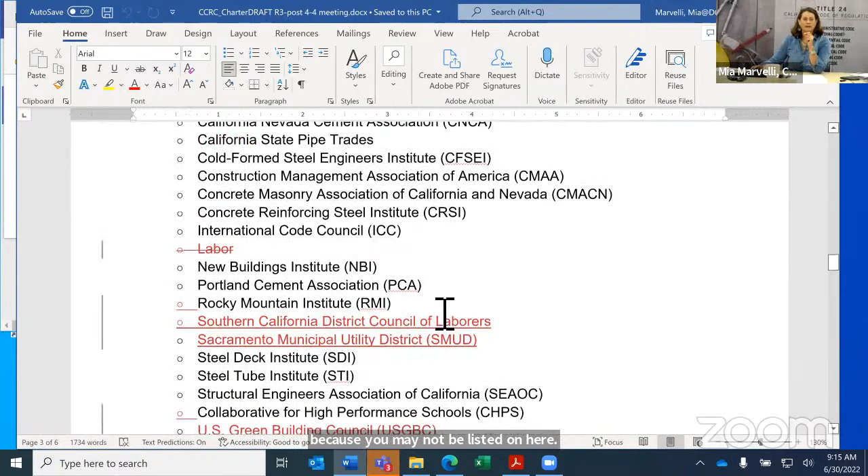I'm going to scroll through here very quickly. We had a consensus at the first meeting that everyone agreed on the rules of engagement for the meeting, and now this version simply adds the Department of Housing and Community Development. The other additions are a few state agencies and non-government organizations. We added a few, but I want to remind everybody that if you're not listed, this is a list that's including but not limited to. So just because you may not be listed doesn't mean you can't participate in the meeting or provide feedback. So with that, I'd like to turn it over to the Department of Housing and Community Development. They would like to provide their overview on their authority and role within the CCRC.

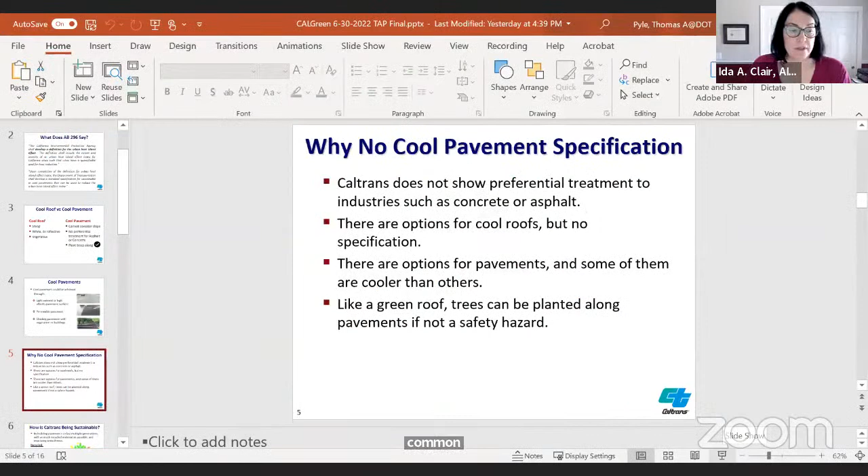Tom, can I interrupt for just a second? I apologize. Yes, please. You may need to forward your slides because the screen we're seeing is on the first PowerPoint slide, just letting you know. All right, thank you so much. I thought I was going forward. I hate it when this happens, don't we all? Tom, it's likely that you have it. There we go. That moved. Okay. Well, I tried to go to the presentation mode, but apparently I wasn't on the presentation mode. This mode works. We can see that fine. Does that work okay? Yeah, thank you. All right, appreciate it.

All right. The previous slides only had words, so I was kind of working my way through the words, so you didn't miss any bright or shiny pictures. So a cool pavement could be achieved through a light color or a high albedo, highly reflective surface. It could be a permeable pavement, and there could also be shading on it, or it could be within a city that has tall buildings around it that are also providing shade,

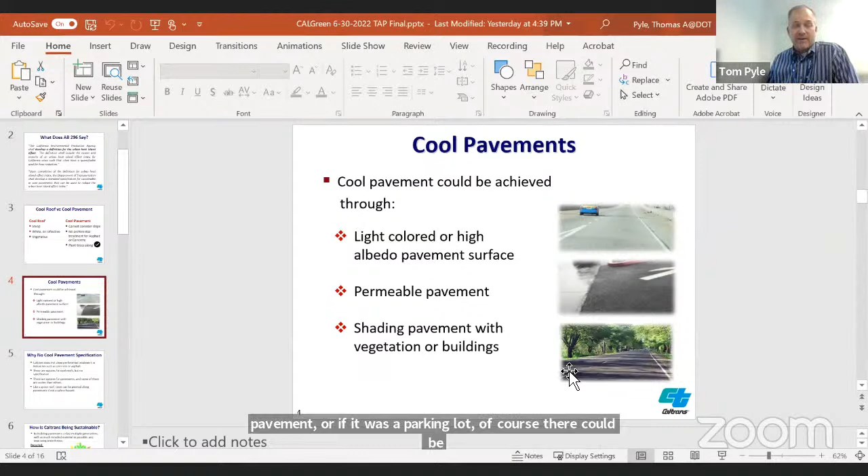or there could be, for instance, north-south or east-west orientation, and some other elements that all come together on a pavement could make it a cool pavement. Or if it was a parking lot, of course, there could be trees or buildings next to it, which could in fact be a very conscientious design of a cool pavement.

So, in conclusion, there's no cool pavement specification, just as there's no specification for a cool roof, but there are elements that make it work. Caltrans does not show preferential treatment to a material. And as with cool roofs, there are options in pavements, and some are in fact cooler than others.

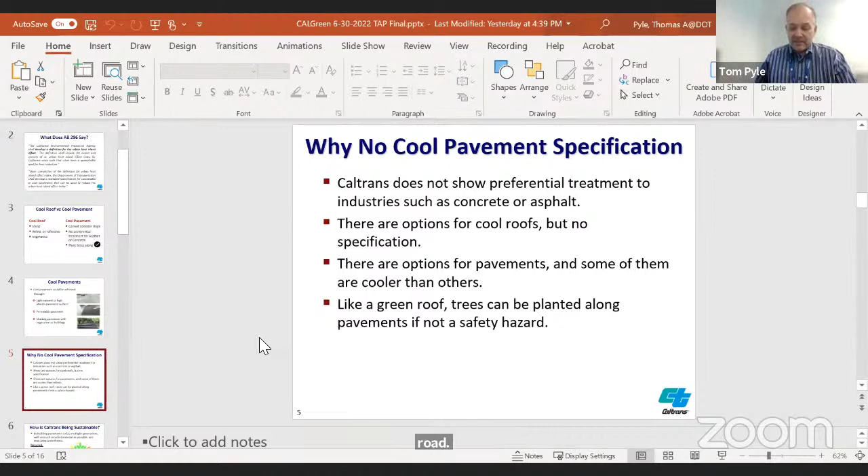One thing about trees I'd like to point out is that while we can plant trees on high-speed highways or urban streets, we need to be really careful for safety. While they can provide shade, as a Department of Transportation, one of our first considerations is the safety of the public in every situation, taking care of drivers who might go off the side of the road. So safety hazards are a big consideration for us.

This is where it really gets exciting for us at Caltrans. Sometimes I think of us in the pavement division as literally the division of sustainability. How is that? By building pavements that last multiple generations, using as much recycled material as possible, and focusing on smoothness. So for the next 9 or 10 slides, I'm going to explain this and how we'd really like to work with you, Director Marvelli.

We recycle asphalt, concrete, industrial waste, water, shingles, tires, railroad ties, and plastic, and the list goes on. I'm going to get into some of those details.

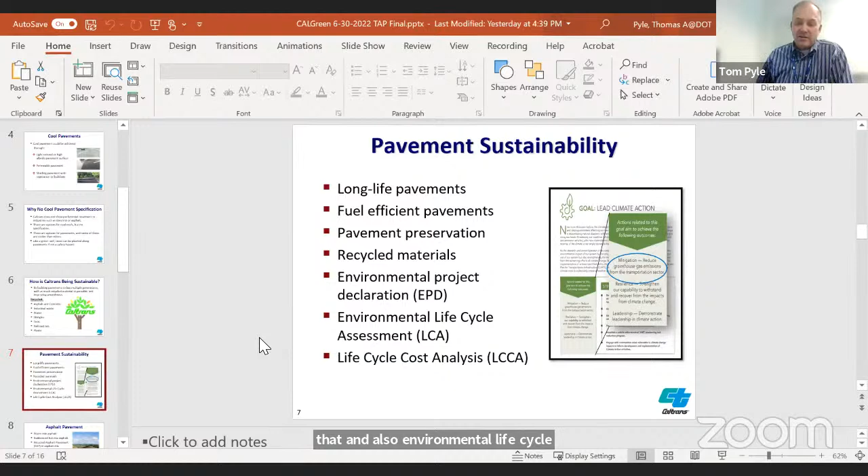Before I do, I also want to talk about some design aspects that are very conscientious elements supporting sustainability. We're looking at long-life pavements. In fact, here in Sacramento, we've built a pavement designed to last multiple generations, 75 to 100 years. We're working on fuel-efficient designs, and we're deeply into pavement preservation and recycled materials. A new thing we're working on is environmental project declarations, and also environmental life cycle assessment and life cycle cost analysis, though I won't get into life cycle cost analysis today.

So, asphalt pavement, what are we doing? Warm asphalt is a term for producing asphalt at up to 100 degrees less in temperature. Typically we heat all that rock, oil, and other materials up to about 350 degrees. When we can reduce that to only about 250 degrees, that massive drop in temperature leads to significant greenhouse gas savings.

We're also using rubberized hot mix asphalt, recycling material into it to make it last longer. We're using RAP, recycled asphalt pavement. And we're figuring out how to put shingles and plastics into our asphalt.

We actually use asphalt pavement as water purification, to filter out the nasties from all the cars that go along—they have brakes, and what's in a brake? Nickel and other heavy metals. We have permits from the Water Quality Control Board to use open-graded asphalt to filter out those nasties before they go into streams and watersheds.

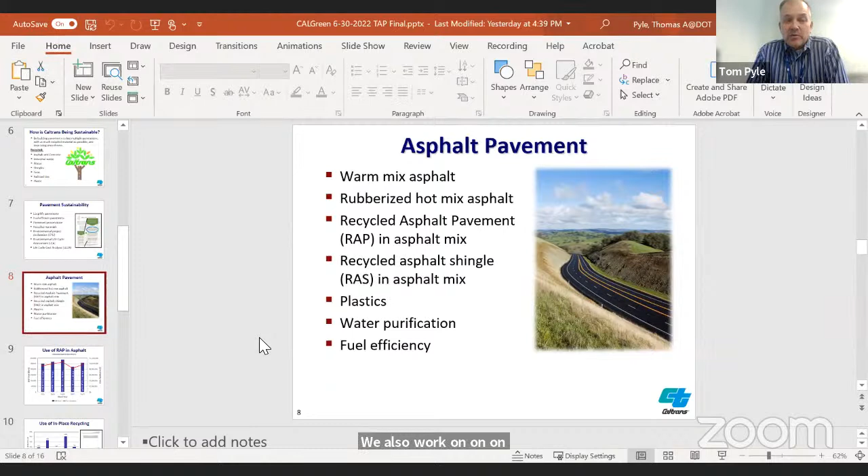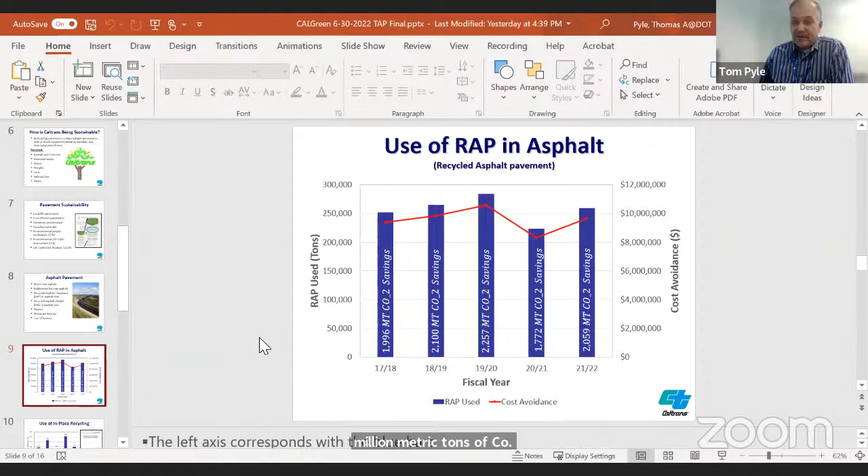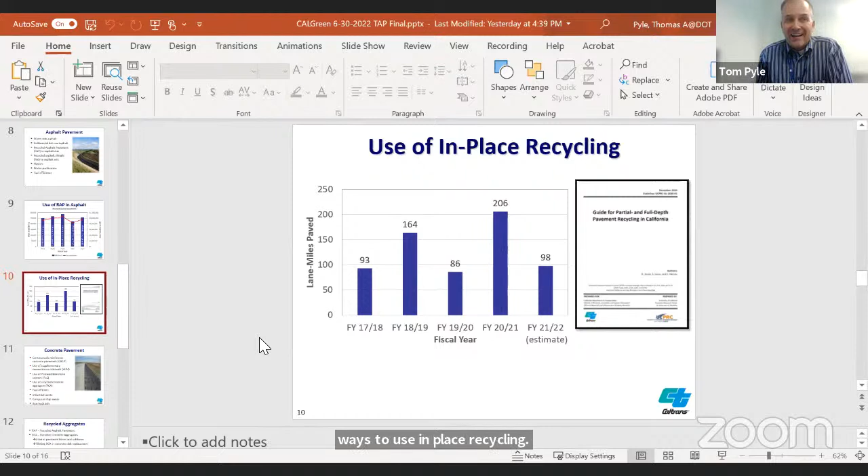When we do in-place recycling, digging up the pavement as it sits, recycling it with cement and some other oils, and putting it right back down in place, we avoid what we call a mill and fill, where we take all the pavement out, haul it to the dump, bring in new material, and disrupt traffic. It's a huge process to remove and replace a pavement. But we're developing ways, creating guides, and working with industry to advance in-place recycling as a strategy.

In concrete pavement, we're working on an equal or greater number of ways to use recycling, reduce greenhouse gas, and increase sustainability. For instance, we're now designing our pavements with continually reinforced steel.

We call it CRCP, continuously reinforced concrete pavement. Those pavements last longer and we can build them a little bit thinner.

We're using supplementary cementitious materials which replace cement, which is among the most greenhouse gas producing products that mankind makes. We're working closely with our industry partners to develop that. We're also using new cements, which are in fact grinding limestone into the cement to stretch the cement supplies and reduce the CO2 footprint of that cement.

We're using recycled concrete aggregate. We are making our pavements smoother so that the vehicles that travel over them are required to use less energy to do so, and they're more fuel efficient.

We're pretty excited about this particular one because so many agencies and people and the news, everybody's talking about new engines and batteries and fuel efficient cars. Well, at Caltrans, we're the group that's pretty excited to think that we could make every vehicle that travels over our pavements use less energy, whether that's electric or gasoline.

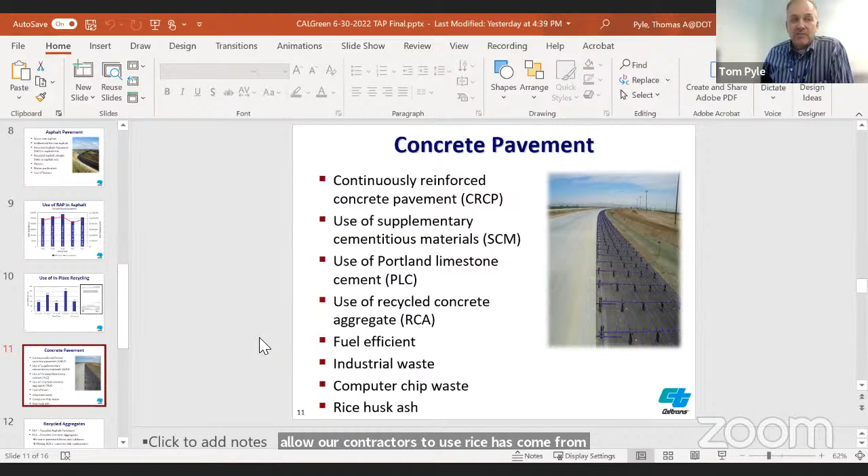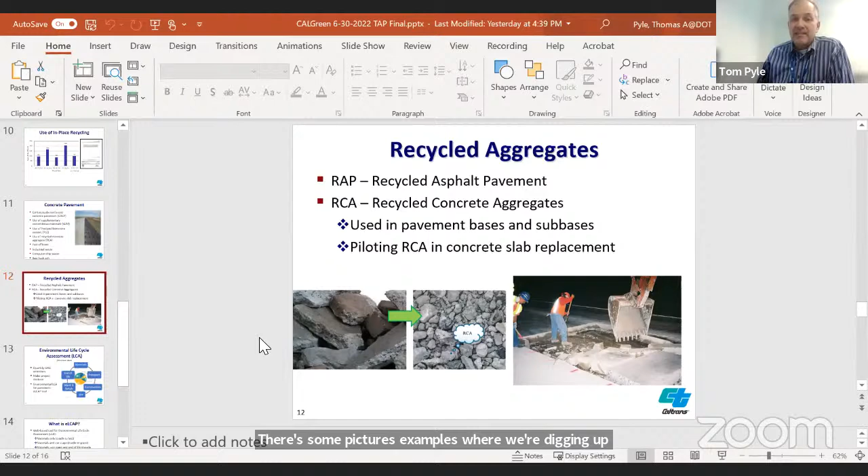We use a lot of recycled aggregates in our concrete, both recycled asphalt pavement and recycled concrete aggregates. Here's some pictures of examples of where we're digging up concrete. We use it both in the base and the sub base, and in some cases in the concrete itself.

So I talked about this idea called life cycle assessment, LCA. In parentheses in small text, think food label. That's basically what this is, thinking about how all of the constituent parts of that material come together. As we think about the material through a life cycle assessment, we're also thinking about transporting the material, the construction and use phase, and the maintenance, rehabilitation and end of life. We're thinking about all of the parts of the cycle over the life of these materials, and we're calling this an environmental life cycle assessment.

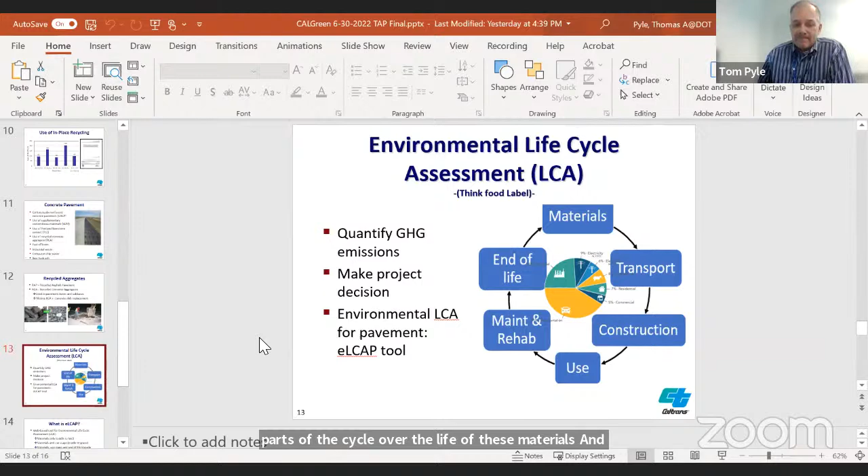Let me explain this a little bit more. We have a program, working with the University of California at Davis. They have a group out there called the Pavement Research Center, so we call it the UCPRC if you hear that acronym. We've been developing for the last few years a web-based tool. There's a number of ways that we can look at the materials we use, whether it's aggregate or oils or cements, or putting it all together to make concrete or asphalt or other materials as well.

We can look at the materials only, and we call that cradle to laid. Clever as we could be on this, we could think a little bit more through the life cycle and include the whole use stage, and that's all the vehicles that are traveling over it. But we're also trying to expand the thought such that we're not just ending it where it was, from cradle to laid or cradle to grave, but cradle to cradle. So we're thinking about the next use of that material.

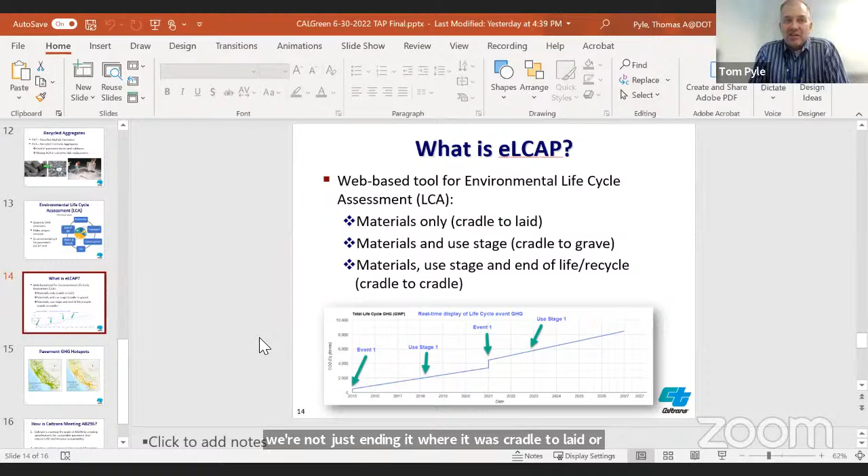One of my last couple slides here is we are focusing around the state. We put GPS coordinates in Caltrans in every crack, rut, and bump in our network. We know where the roughest pavements are. We know where the cracks and the ruts and the potholes, we know where they all are. Every single year we take an analysis of our pavements.

And we've been trying to be a little bit more clever about it now, with having SB1 money and a little bit more money to be more strategic about the projects that we build. We're specifically looking at locations that have rough pavement that obviously would require a lot of energy for those vehicles to travel over them, and then those with the highest traffic count. So when we put the highest traffic count on top of the roughest pavements, we can find those locations. Sometimes they're less than a mile long.

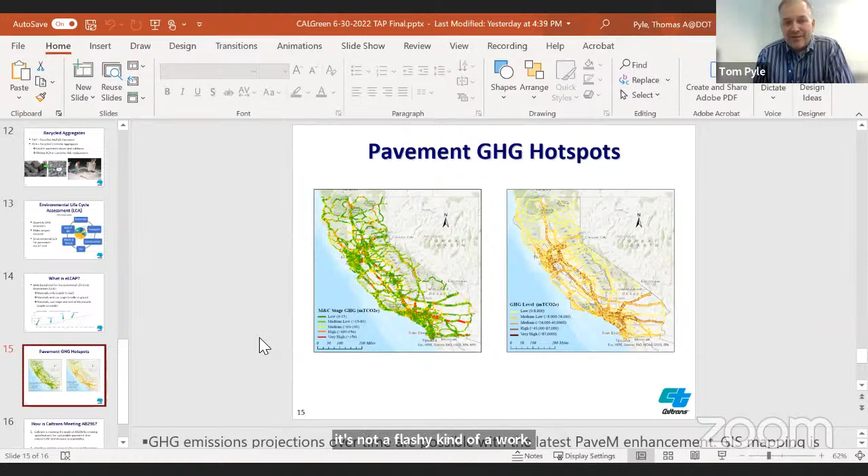And we're strategically going to be smoothing those pavements out, purely for the purpose of reducing greenhouse gas emissions of the vehicles that travel over them. It's kind of quiet behind the scenes, not flashy work, but we're pretty passionate here in the pavement program about figuring out ways to reduce emissions.

So my last slide is to tie a bow around all of this, Director Marvelli: how is Caltrans meeting AB 296? Caltrans is meeting the goals of AB 296 by creating specifications for sustainable pavement that reduce greenhouse gas and increase sustainability.

I have provided you a handout, and you can share that as you wish. We put it together a number of years ago, but it's a list of all of the specifications, and we would be very happy to work with the Building Standards Commission to further develop some of these ideas for sustainable pavements, for recycling materials, using additional materials within them, thinking about a longer design life, and thinking about ways to shade for cool pavements or consider that as well. But thank you for the time. I really appreciate the opportunity to work with you, and I'm happy to answer any questions.

Wonderful, thank you so much. And I see how this now extends well beyond the limits of Title 24 for building. So something we want to consider is how this would apply to on-site pavement, as opposed to the visual now of highways and freeways, but also then the concrete aspect of walks and walkways. I'll open it up to the group if you have any questions for Mr. Pyle.

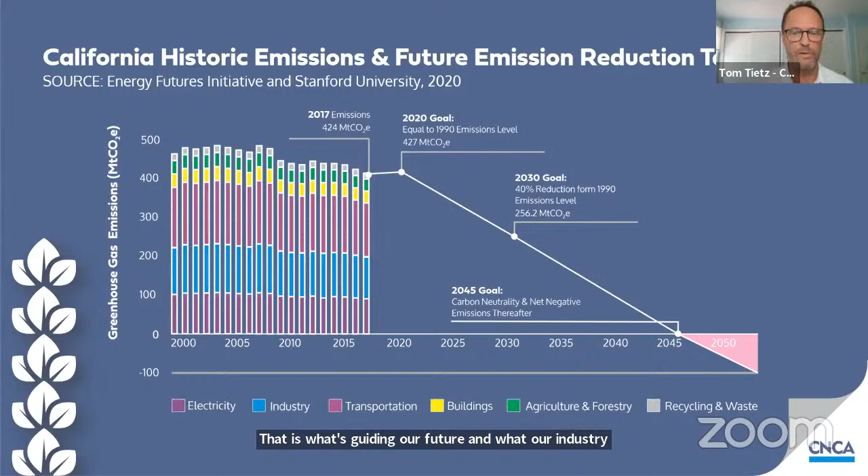On this slide, you can see where we've come and where we're going. As of 2020, the state reached its goals of AB 32 to be below 1990 levels of GHG emissions by 2020. The state, by law, must now reach 40% below 1990 levels by 2030, with the ultimate goal of reaching carbon neutrality by 2045. That is what's guiding our future and what our industry wants to be participating in moving forward. We want to follow that trajectory and are making commitments to get there.

I also think it's important to look at California specifically, because these goals are specific to our state, and it's important to see where emissions come from right here in California, inside our borders. If you look at this graphic, you can see from the data from CARB, buildings in the yellow there are almost 9% of the state's emissions. In the blue section, you can see industry, just over 21% of the greenhouse gas emissions in the state. And in the upper left there, you see cement. We are 1.8% of California's greenhouse gas emissions.

And cement is the regulated sector for cement and concrete. So we are the entity that's regulated by the Air Resources Board under the Cap and Trade program. And we've been collaborating very well with that agency since its inception.

What's interesting to note, you see that 1.8% there. Cement typically makes up roughly 85% of the greenhouse gas emissions for concrete. So you don't see concrete on the list because there are well into the hundreds of ready-mix companies and concrete producers using that cement in their products. I just think it's important to put that in perspective. You don't see other building materials necessarily on that industrial side because they're often imported from other places. In fact, a portion of the cement used in California is also imported from overseas. The asphalt that Tom Pyle was talking about would fit under the refinery section, under that 7% section of industry.

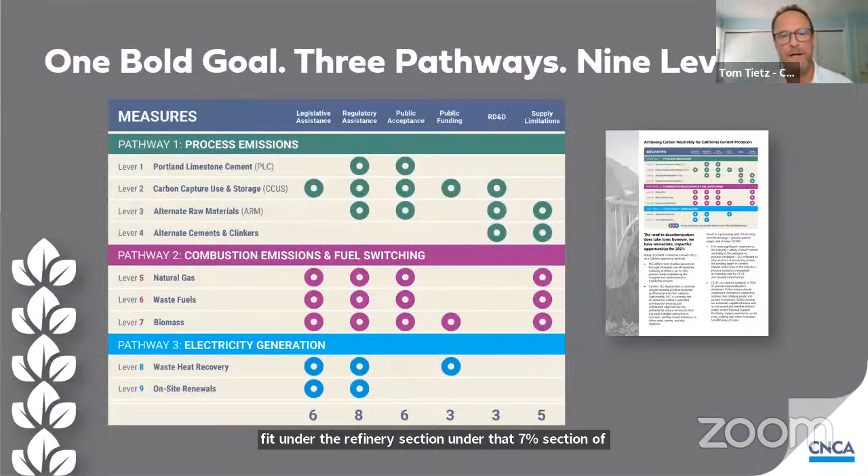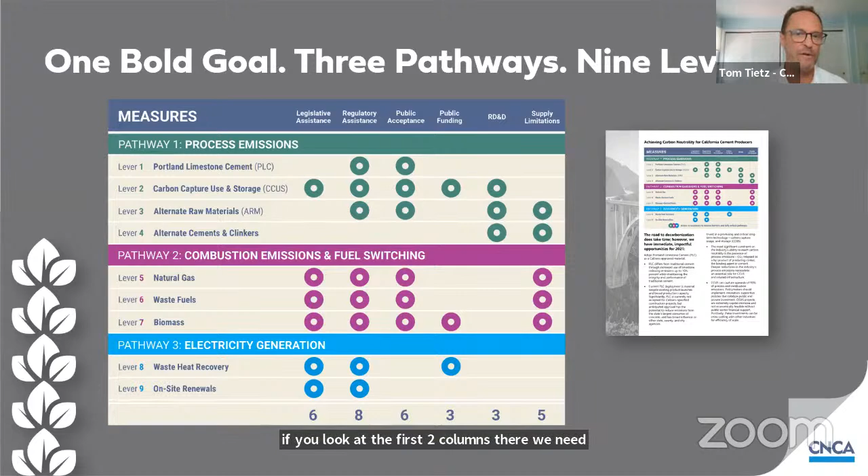So what is the cement industry doing about this? Last year, we put together a commitment, a carbon neutrality plan that outlines 3 pathways and 9 levers to achieve carbon neutrality for a very difficult to decarbonize industry. In outlining these pathways and levers, we've also identified where we need help. If you look at the pace of change that needs to happen in the next 22.5 years, things have to change. We have to be able to improve the way we make cement at a faster clip than we are now. In order to do that, if you look at the first 2 columns there, we need legislative assistance in 6 out of these 9 levers and regulatory assistance in 8 out of these 9 levers.

I want to mention that we're very proud that plan became part of the foundation. Really, it is the foundation for the first sector-specific bill in California history to focus on achieving net zero emissions. So last year, we worked closely with Senator Josh Becker and the Natural Resources Defense Council to come up with a way to put together the guidelines that CARB can put in place in order for us to reach these very aggressive goals. So we're proud of that and are just starting now to work with that implementation team.

But the last thing I want to mention is that I think this bill is a good example of when industry gets involved from the beginning, things go well. We've had other examples of legislation where we haven't been involved at the beginning, and oftentimes those don't go as well. So in the case of the Building Standards Commission and the effort here with the collaborative, we dearly and deeply want to get engaged when we're focusing specifically on our industry. And we're used to doing this. We're engaged with agencies, both at the state and local level, and even providing design assistance at the project level with architects and engineers to improve their specifications for cement on a regular basis.

Next, I want to go to Charlie Ray, and we'll let Charlie talk about ready-mix concrete in California.

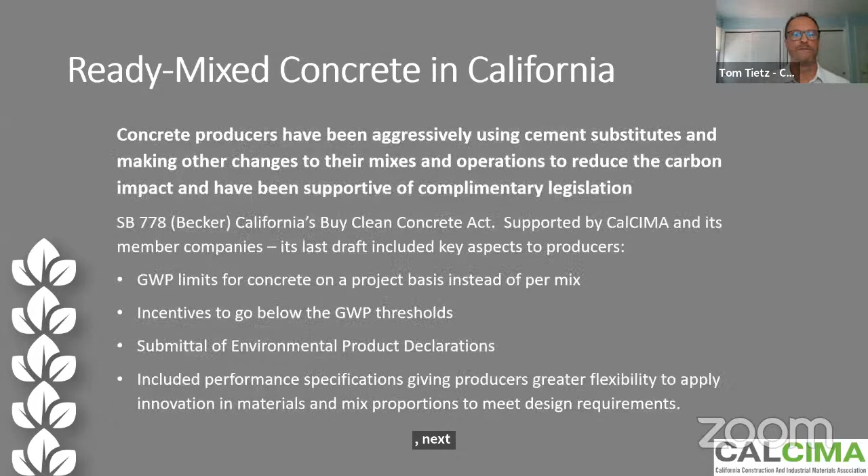Next slide. Did that go through, Charley? This was the first slide. Here's the second slide. Yeah, so you can go to. Let me go to the next one. So, okay. So the next one, whoops, go back one.

The prior slide just recaps some of the other efforts we've undertaken with other agencies to reduce the carbon impact. A lot of this is with Caltrans, but an important one from our perspective was to allow the use of returned plastic concrete. This is something that ARB had identified in initial discussions after AB 32 as an important area. And the specification developed was actually the first in the country, and it helped ignite some more national changes in codes also.

Importantly, when we work with Caltrans, it's usually to try to get them to help us use more sustainable materials such as cements that have a lower carbon, or blended cements, or different supplementary cementitious materials, or blended supplementary materials on the one hand, and then also ways to reuse the waste or the returned material. So the returned plastic concrete, the recycled aggregates in different applications.

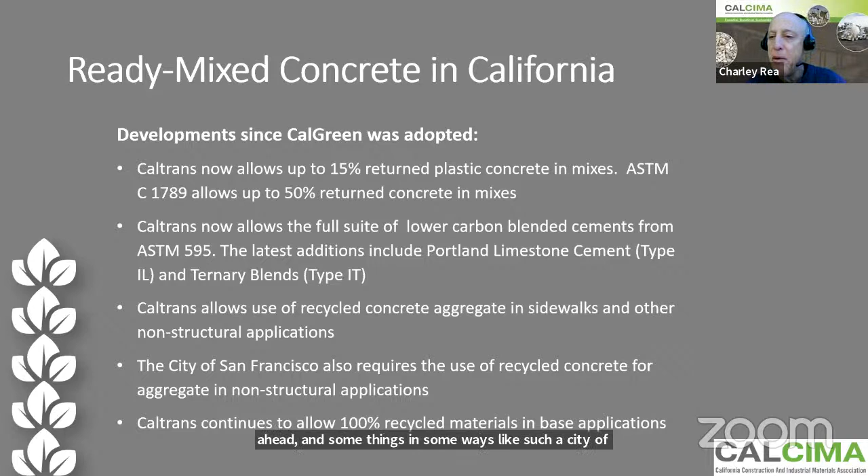As you can see, there's other initiatives. Some cities and counties are farther ahead in some ways, such as the city of San Francisco. But anyway, that just shows there's multiple efforts going on. You can go to the next slide.

See the next slide there, Charley?

Yeah. And lastly, the second part, I wanted to recap some of the challenges for concrete producers. On the one hand, it's produced from many plants throughout the state. There's at least around 300 production plants for concrete, and that's in every part of the state. So each plant has some unique issues or challenges of their own, and that means they can have entirely different raw materials, which can be the rock and the sand, the cement, water, just conditions in that area. So it's always very challenging, and it's hard to have a one size fits all essentially.

And then the other aspect is that the end product can vary quite a bit. And so concrete producers are constantly having to change the mix of materials, proportions of materials to achieve different purposes. Building a road is entirely different from building a building or a sidewalk or whatever. And there's just different requirements as far as, say, strength or timing of the material to set and harden. And again, varying by strength and other different factors.

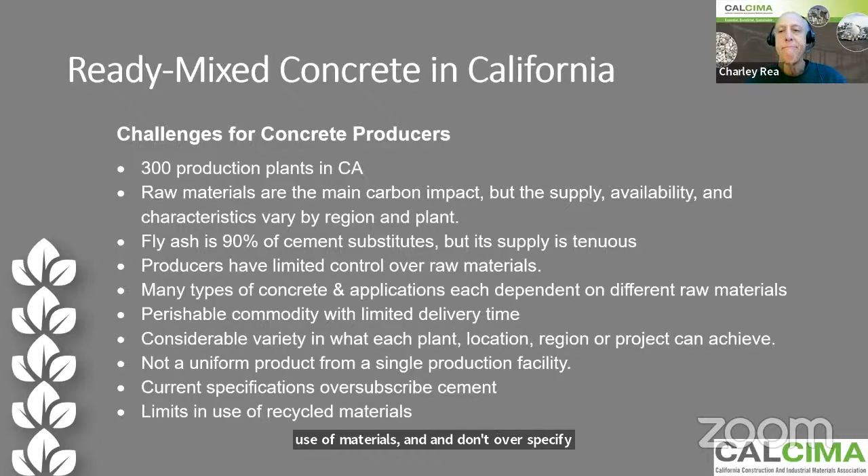The other thing I wanted to mention about NRMCA is that they're really good at diving into specifications for specific firms. Oftentimes things are out of date, or many times, having been an architect once too, you use standards over and over again, specs from the previous job, and then it goes on for years. What they can do is identify efficiencies to change your specifications so that they're greener. And some of these are very easy to do.

So that's one excellent resource from NRMCA. They're also a certified entity doing environmental product declarations. And next, I will ask ACI. Angela? Yeah, thanks. Yeah, no problem.

Thanks, Tom. So I'm with a brand new Center of Excellence for Carbon Neutral Concrete that the American Concrete Institute has launched. As many of you may know, ACI does the concrete building codes and specifications. It's a long established, over 100-year institute. And the consensus-based process takes time, and ACI decided to have a subsidiary focusing on carbon neutral concrete because we need to move fast.

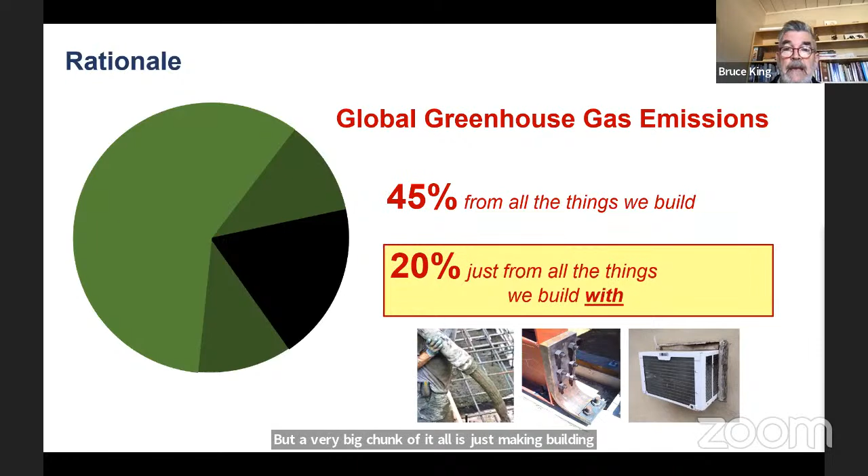Next. The thing about that so-called embodied carbon, the upstream emissions of making the materials we build stuff with, the asphalt and concrete paving, the buildings, everything, is that it has a time value. This is something that Tom Phillips was trying to talk about a moment ago in his question, because they go up in the air right away, long before you ever move into your new building project. Those are up in the air cooking away. It's the amount of the emissions times the time it's in the air. And so it has a time value that exacerbates what those materials are. Next, please.

By many people's estimation, that means that if you build something this year, 3/4 of your climate impact is from the materials you chose to build with. That's going to vary up and down, of course, depending on the project and where you are and a lot of things, but it's a huge chunk. It's not trivial. Next, please. Next.

Well, we've covered this, I think. You all get the picture. EPDs, environmental product declarations, are how we measure what we're going to have to manage. And they're just like the nutrition labels that we see on food.

Next, please. When you gather up a bunch of EPDs for any particular product, a doorknob or a cubic yard of concrete, eventually you start to get a bell curve and you can say, this is my industry average or my regional average. And then you can set policy. That's how you do it. Say, we're going to go up above that, give you another 25, 30, 40% above that. And then anything above that line is no good anymore.

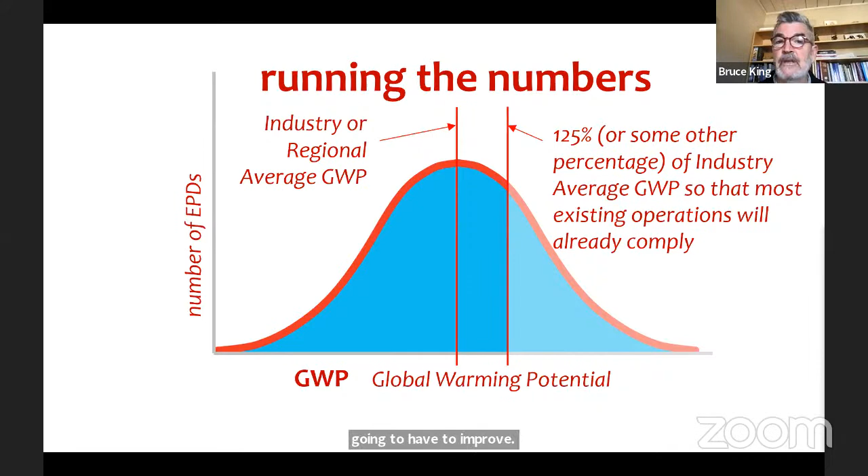We draw the line. Those of you with the highest carbon footprints are going to have to improve. That's basically how policy is being written now all over the world at the municipal, state, and national levels. Next, please. So we're here to address CalGreen. And of course, we want to tie it to Buy Clean in every way possible, so it's not a jarring new thing to the industry or to California consumers. Next.

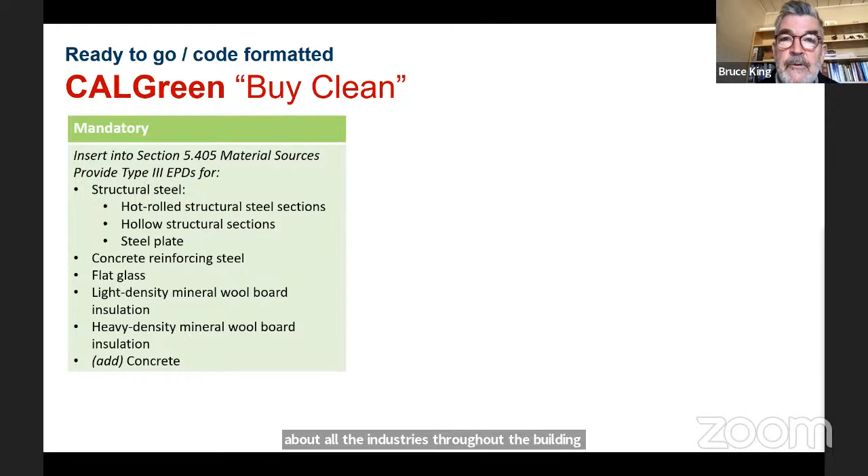The mandatory provision is just provide EPDs, because right now we're still gathering information about all the industries throughout the building industry and writ large. We don't know what our carbon footprints are, and we have to know that so that we can manage what we now have measured. So the mandatory provisions are provide EPDs for all of these materials in Buy Clean and add concrete. Next.

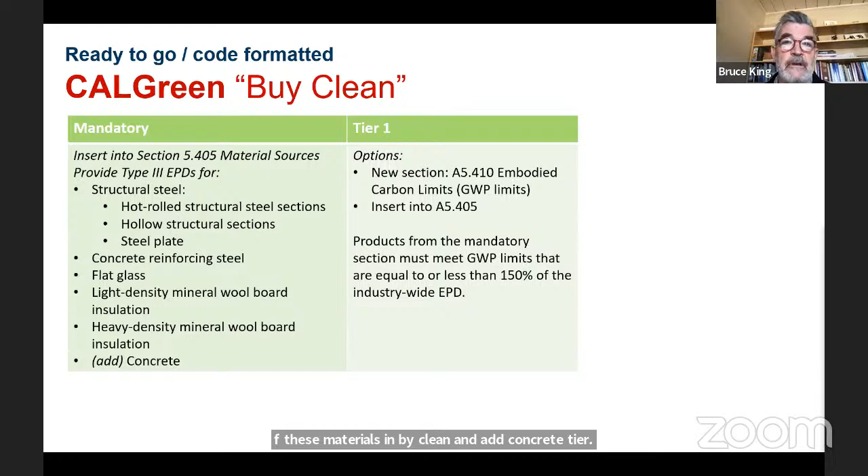A tier 1 provision would be to start to put limits on it. Set some sort of upper ceiling where you just can't go above that. And tier 2, please, would be a more stringent limit. That's the gist. They fit neatly into certain parts of CalGreen, and much more detail is in the literature that we give you. Next. And here's the gist. And I'll let you look at this for a minute. It's what we're proposing. And of course, there'll be lots of discussion if it moves forward.

But I want to reiterate that what both Charley from CalCIMA said earlier and Tom Tietz and I have both talked about many times is that concrete can be improved pretty easily by just not using so much cement. Cement is the high carbon ingredient in concrete, and it's also the high cost ingredient in concrete. And I've been a practicing civil engineer in California for 44 years, and I can tell you every concrete I work on has way more cement in it than it needs.

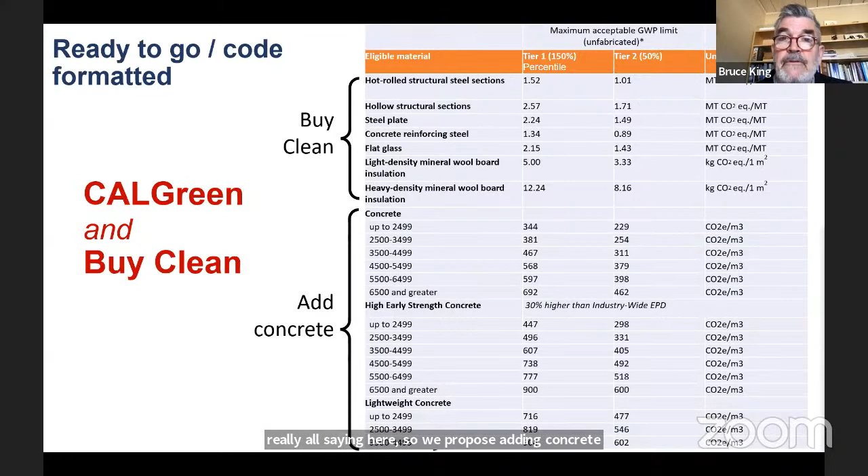It's just a habit in the industry. Structural engineers, ready-mix producers, everything. We've gotten lazy about it because nobody ever cared. Just as 50 years ago, nobody cared about efficiency of appliances until Art Rosenfeld showed up. Now we have to care. And that's the gist of what we're really all saying here. So we propose adding concrete to CalGreen and Buy Clean. We just have to figure out how to do it. The details are there to be worked out. Next.

Cost implications, well, there's so many different materials we could talk about, but in concrete in particular, as I said, the most expensive ingredient is the most high carbon ingredient, it's the cement. And Tom Tietz already briefly mentioned that there's a huge opportunity just to switch to type IL cements, blended cements that use other low carbon ingredients to get the same performance with a lot lower footprint. The industry just needs to find out and start using it. Next.

That's it. That's it on embodied carbon. I'm going to hand off to my colleague from Rocky Mountain Institute in a moment here, but we're talking about getting to true zero and not missing anything that's hidden under the carpeting and addressing all the possibilities through CalGreen, and let California be a leader in this department of getting to a real true zero built environment. Thank you.

Hi folks, I'm going to speak for a few minutes about whole building life cycle assessment and a proposal for how we could include that in CalGreen. A lot of the speakers previously have mentioned EPDs and sort of segmenting how we can get emissions data for specific materials like concrete or steel, but whole building LCA puts this all together. Next slide. What is whole building LCA?

So it just takes the bill of materials from a building project, and then for each of those materials, you're gathering life cycle information data, which lives in a tool, and there's many software that exists that actually can compile this. And what you get is a total profile for the embodied carbon of your building project. And this would be done during the design phase of a project.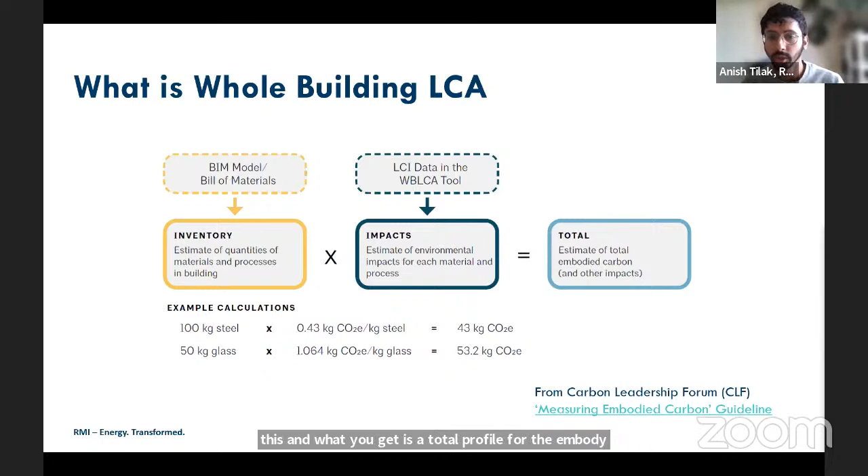Next. Why is whole building LCA useful and important? It provides the full picture. So unlike EPDs, which are looking just at the manufacturing phase, the whole building LCA would look at everything from manufacturing to construction and all the way through to end of life. And it enables the project team to focus on the areas that would get the most impact.

So which materials should they seek optimizations in? It also will allow project teams to take credit for design measures, like designing a more efficient structural system or choosing an alternate material during the design phase. These are things that could be captured through whole building LCA.

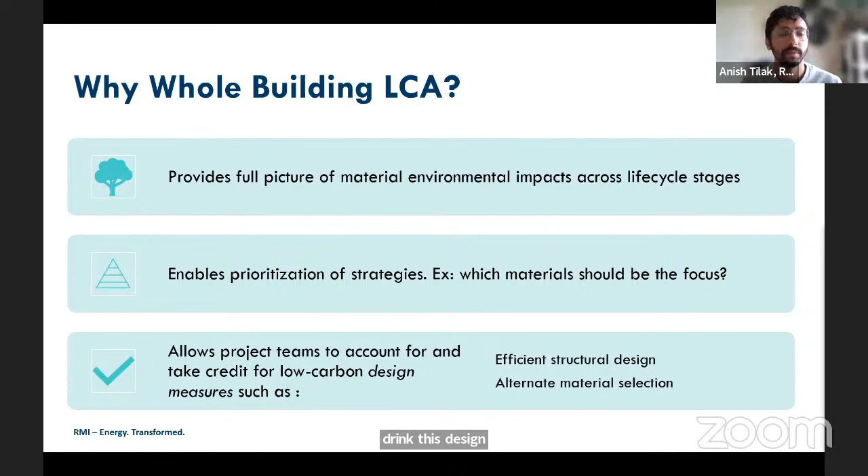What's the value of it? Studies have shown that you could achieve up to a 46% reduction from a typical building through whole building LCA and optimization through that analysis. That's a really huge chunk of reduction, and we think this is a valuable carbon reduction opportunity.

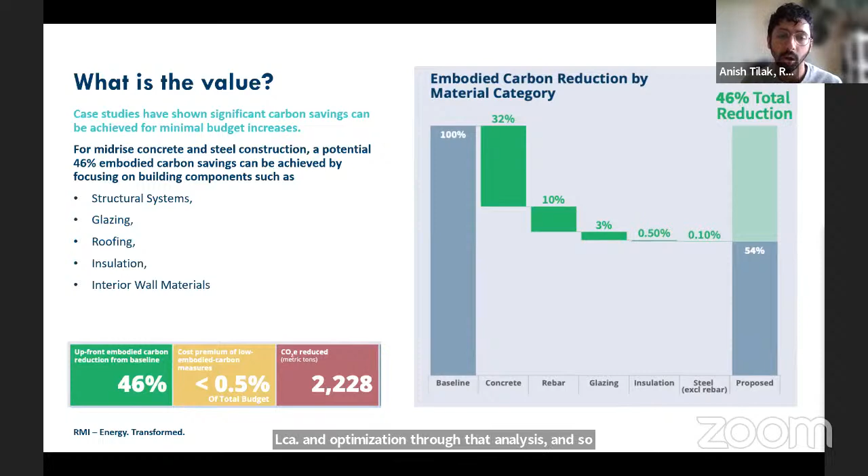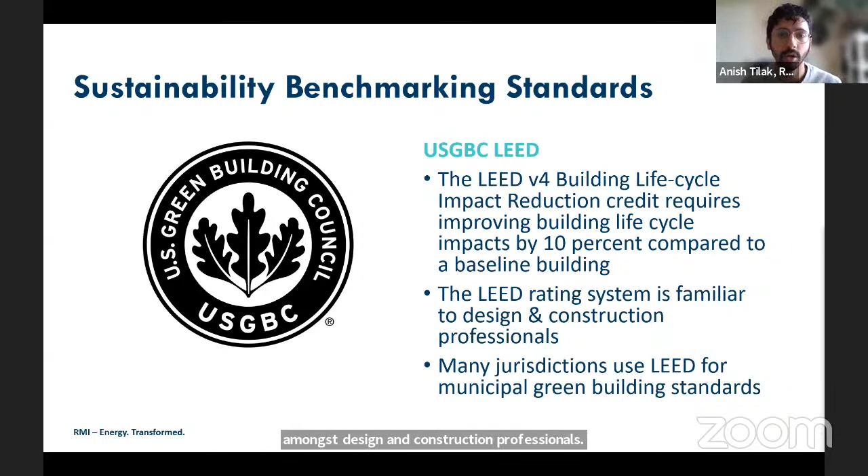There are some existing references for whole building LCA in the industry, so there's great familiarity amongst design and construction professionals. One is the US Green Building Council's LEED rating system, which has a credit that uses whole building LCA. In terms of policy, there's existing reference policies, one in Vancouver, which requires whole building LCA for new building projects seeking rezoning, and the City Council there is going to include whole building LCA with reduction in an imminent building code update. So there's precedent out there for places already doing this.

CalGreen already includes whole building LCA as a voluntary elective measure. So there's already language in the code as it stands today that has increased familiarity in the industry with what this is and what the process to do this analysis is.

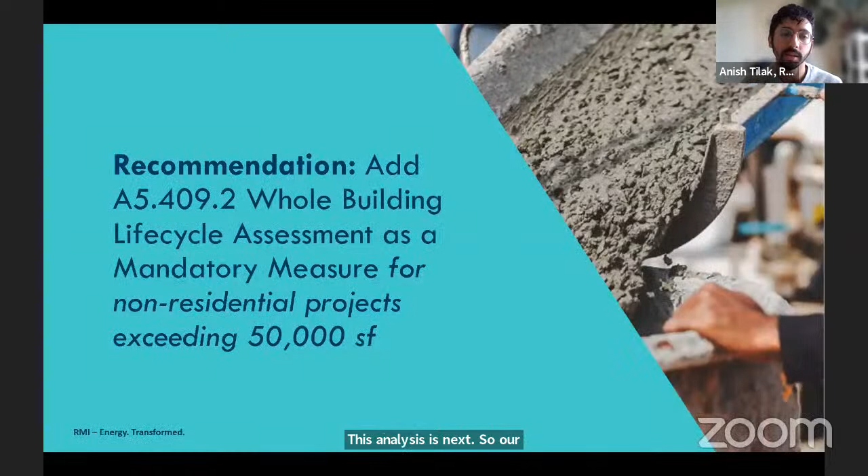Our recommendation is to elevate this elective voluntary LCA language, with some edits, as a mandatory measure for large non-residential projects. I'll speak for a few minutes about why we're choosing that segment of the market.

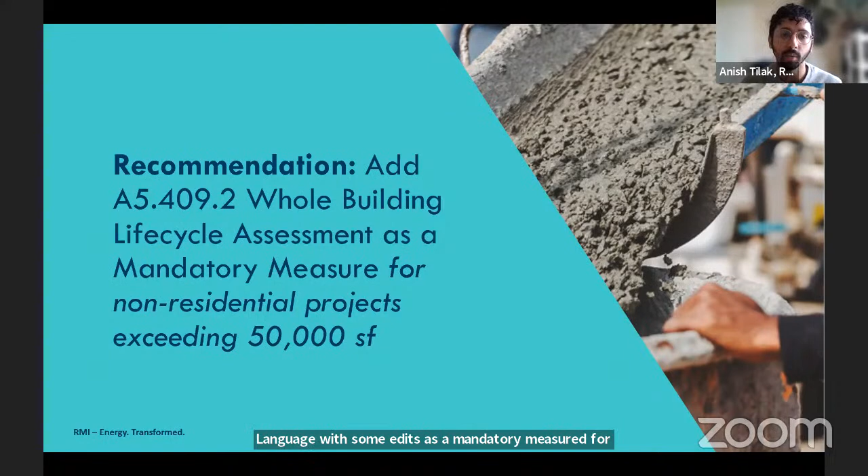Our suggested proposal would be to just use the language and targets as is, with a few edits, as the mandatory requirement for large projects. For tiers, you would just increase the level of performance that you would be asking for.

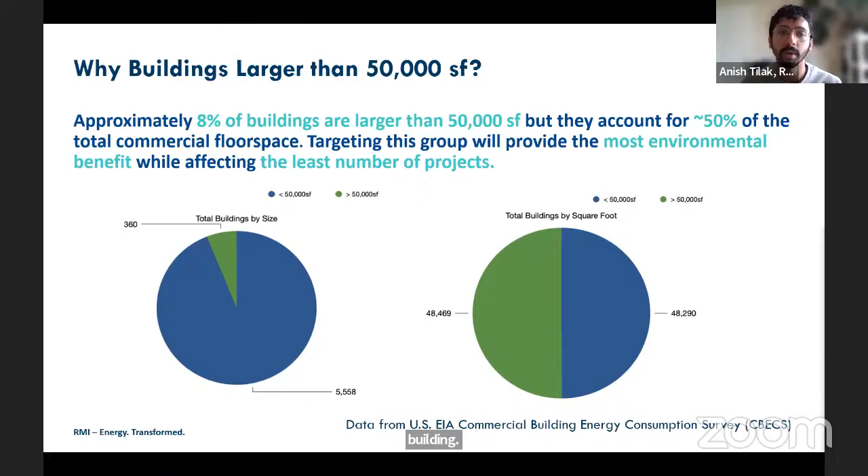Why large projects? How did we choose this 50,000 square feet threshold? We believe this is the right number because 50,000 square foot commercial buildings account for over 50% of total commercial floor space, but they're only 8% of the buildings. So by targeting this group, you get the most environmental benefit from affecting the least number of projects.

How much will this cost? Based on data collected in the city of San Francisco, whole building LCA as a design service costs approximately $15,000. In the context of a large budget project, this is just a drop in the bucket. So it's an effective measure, and not only is the analysis useful to reduce embodied carbon, but it also can enable overall cost savings because you're really doing a material analysis during the design phase. So it's a valuable cost saving measure as well.

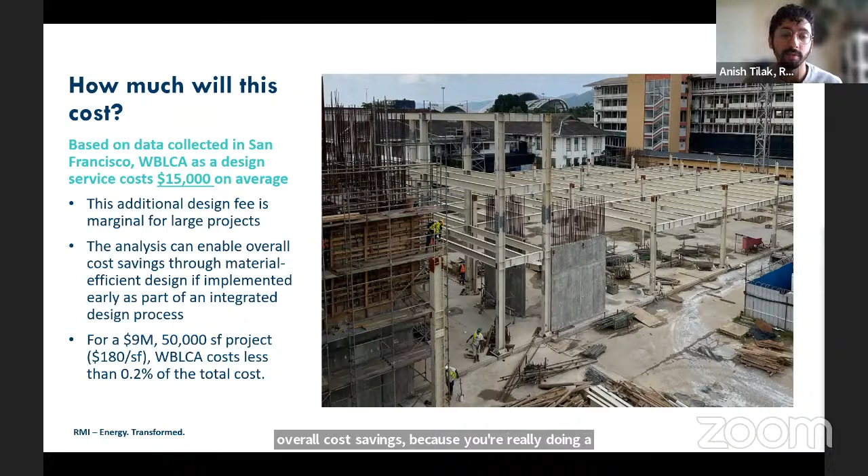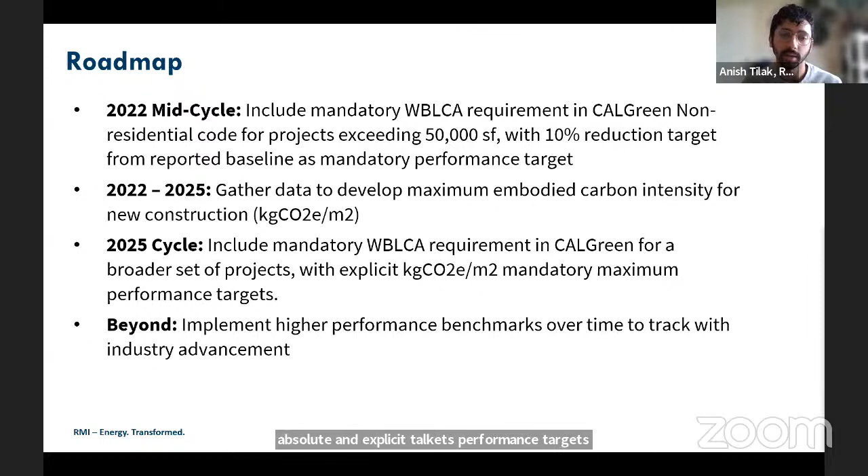Finally, a roadmap about what's short-term versus longer term in CalGreen. For this update, we've presented our recommendation. Longer term, we believe the state has the ability to collect data from this process and set more absolute and explicit performance targets for whole building LCA benchmarks. Thank you. I'll hand it to Larry Strain to talk about existing buildings.

Thanks, Anish. It's nice to be here. So I'm here to talk about why existing buildings matter in this conversation.

We've got a lot of existing buildings. They're not very efficient. From a carbon standpoint, we can't really afford to replace them all, and we can't afford to leave them alone. We also build a lot of new buildings. They're generally more efficient, but it takes a lot of carbon to make a building.

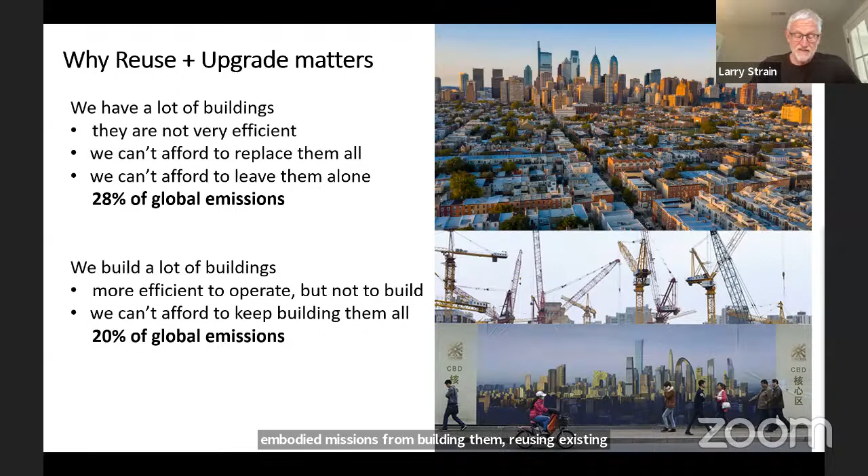As Bruce said, most of the emissions from the buildings we build today will be the embodied emissions from building them. Reusing existing buildings avoids future embodied emissions from new construction. Upgrading existing buildings reduces current operating emissions.

Reusing and upgrading existing buildings presents a huge opportunity to reduce both embodied and operational emissions. Reusing buildings and materials, particularly when it reuses the building structure and envelope, reduces embodied emissions by 50 to 75% compared to a new replacement building. Upgrading and electrifying our existing building stock is an effective way to drive down operational emissions quickly. We know how to do this, and we know it's less expensive than building new buildings. We're still going to need new buildings, but we think it's time to prioritize reuse and upgrade of what we already have.

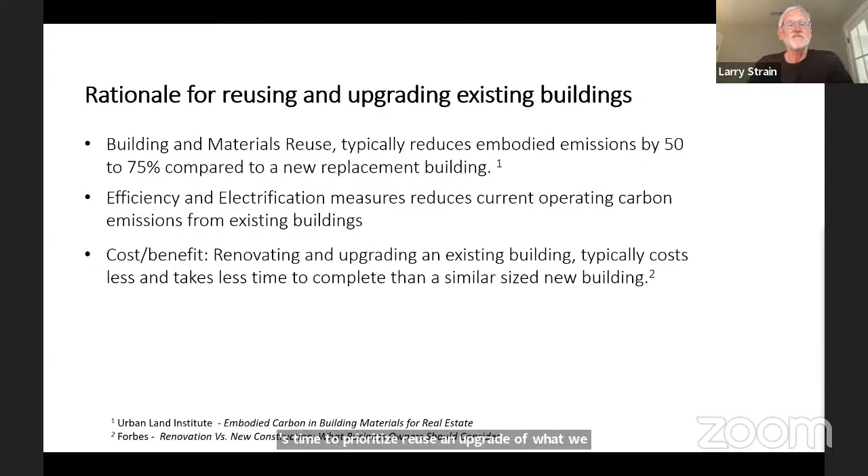The code sections that address reuse, especially reuse of buildings, are in A4.105 and A5.105. They're currently reserved sections and they're voluntary. The issues we have are that, one, they're not mandatory, they're still voluntary, and they're more focused on building deconstruction and material reuse than on building reuse.

They also don't incentivize maintaining, salvaging, or reusing carbon-intensive materials, or diverting bio-based materials from landfill. So the proposed changes include changing the titles to emphasize building reuse, requiring projects over 50,000 square feet to document the carbon emissions from reusing a project compared to building a new project. And then in Tier 1 and Tier 2, require documentation for smaller projects and require efficiency upgrades for existing buildings tailored to uses and occupancy types. This would be based on ASHRAE's Advanced Energy Design Guide.

Projects that comply would maybe not be required to submit product EPDs because you've already done so much. You might be able to give them a benefit there.

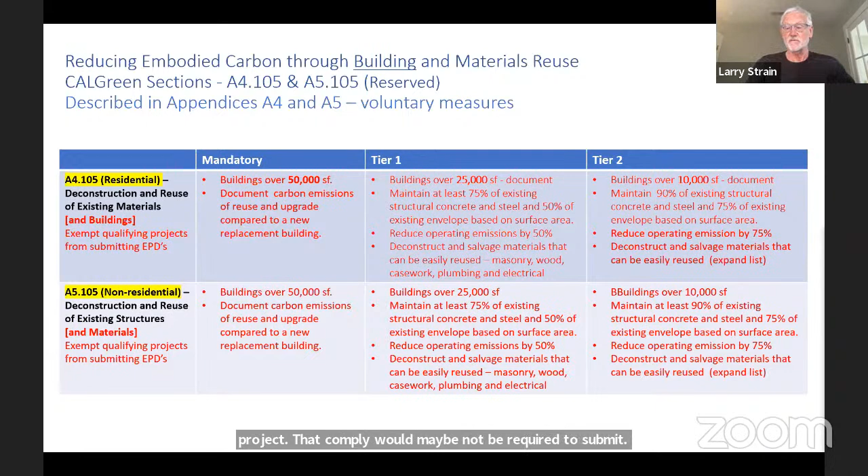We've proposed specific changes and additions to these code sections that emphasize building reuse, not just material reuse. And we're defining what qualifies as reuse for Tier 1 and Tier 2, and also requiring minimal efficiency upgrades. This is just an example, but we've got all of these sections, A4.105 and A5.105, with proposed code changes in the repository materials we're submitting.

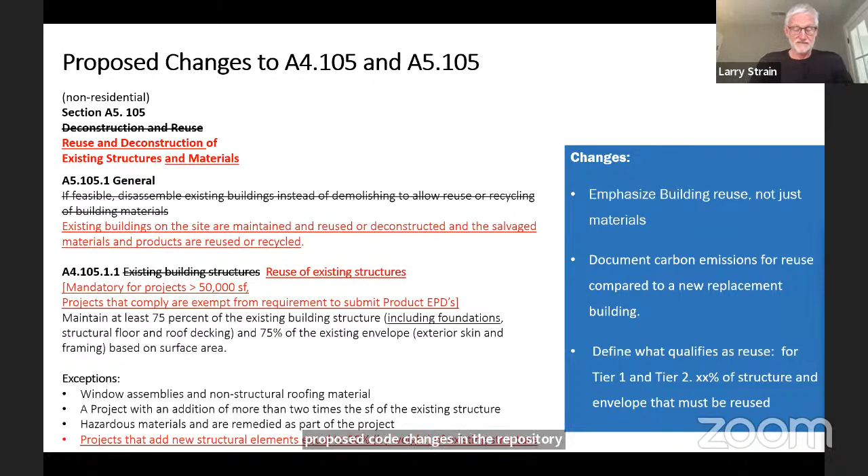So in future code cycles, emissions data that compare reuse to new construction could be used to inform planning and development policy and help set carbon budgets. We also need to develop energy upgrade strategies tailored to use and ownership types, and we need guidelines for operational emission reductions at key points in a building's life cycle, at property transfer, major remodels, tenant improvements, etc.

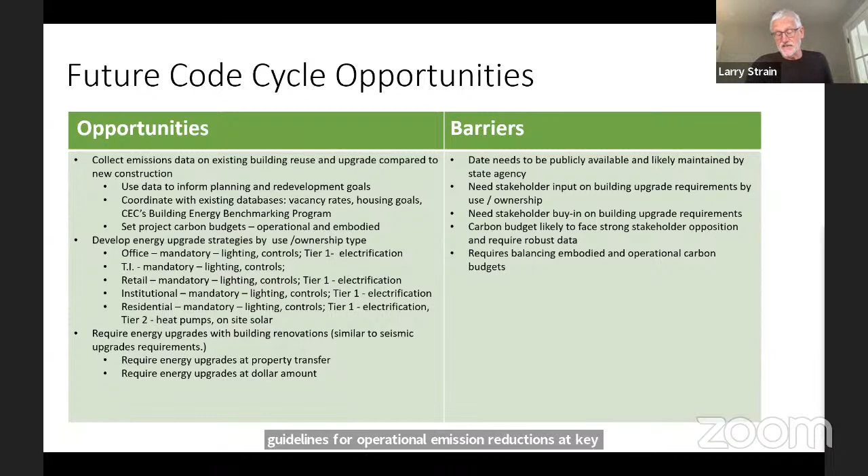Numerous sources indicate that it's generally less expensive to renovate and upgrade a building than it is to build a new one. That's pretty well documented. Incremental cost increases for energy and electrification upgrades are offset by cost savings from decreased energy use.

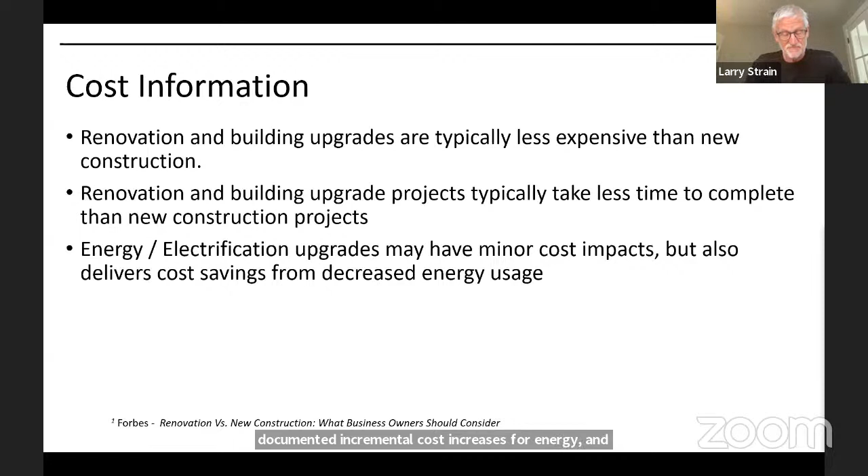Existing buildings are a huge source of carbon emissions. The operational emissions from them are 28% of global emissions. We need to address existing buildings if we're going to reach our climate action goals, and we think Cal Green has a great opportunity to begin to do this. Thanks.

Hi, I'm Wes Sullens. I'll take a stab at this refresh. As you've heard, there's a lot of great new ideas that we're looking at adding to the code in this midterm cycle as well as in future updates. I think with all of that, there needs to be some space made for these new ideas.

The Cal Green Code's been in place for over 10 years, required on many projects, most projects. Perhaps there are some things that could be moved, streamlined, removed, et cetera. So we've created a list of priorities that are some moderate short-term changes in Cal Green, as well as some others that could be refreshed. Some of the ideas are to reduce measures that are duplicative, things that point to other code sections or other public resources code. We could minimize measures that are required by other state laws or statute. Perhaps things that are required in law don't need to be in Cal Green anymore and don't need to be inspected and verified at the local level.

We could move some measures from Cal Green into other code sections, like water conservation fixtures could perhaps be in the plumbing code, or some light pollution reduction or other measures could go to electrical code. There are also some strategies that maybe are best in just the building code overall, like the requirements for overhangs and sloping away from buildings, not pointing sprinklers at buildings, and rodent proofing, things like that. Those are really quality construction measures that maybe don't need to be in Cal Green anymore.

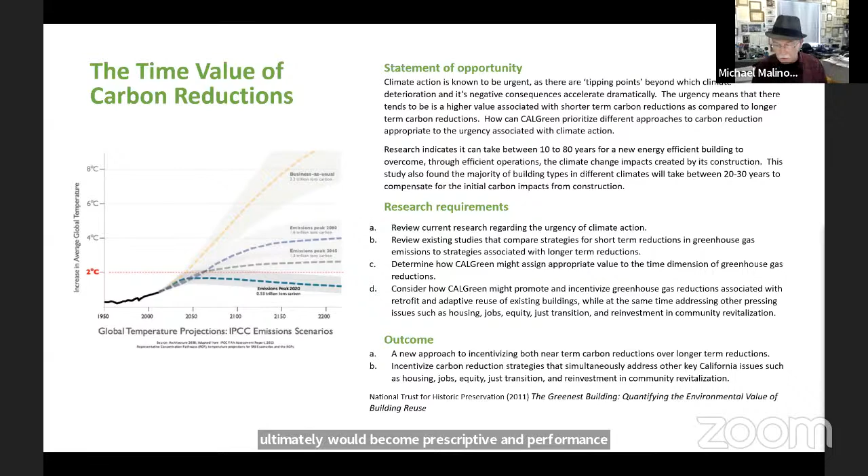Next slide. So we've covered a lot of material. Why cover so much so quickly in this? Because we took this very seriously. As I mentioned, countless hours by numerous people and over a dozen organizations have been working very hard over the last month to put this package together. The underlying knowledge that we're facing an emergency makes time critical in terms of addressing this crisis.

And we have a history in California of being leaders. We gather together, we coordinate, and we proceed with thoughtful actions. And that's what we're suggesting, starting now, not years down the road. And with that, I appreciate your giving us this opportunity. We're thrilled to be here. We're happy to answer questions. All the details will be uploaded to the repository, and we expect there to be robust conversation and consideration of these ideas. Thank you.

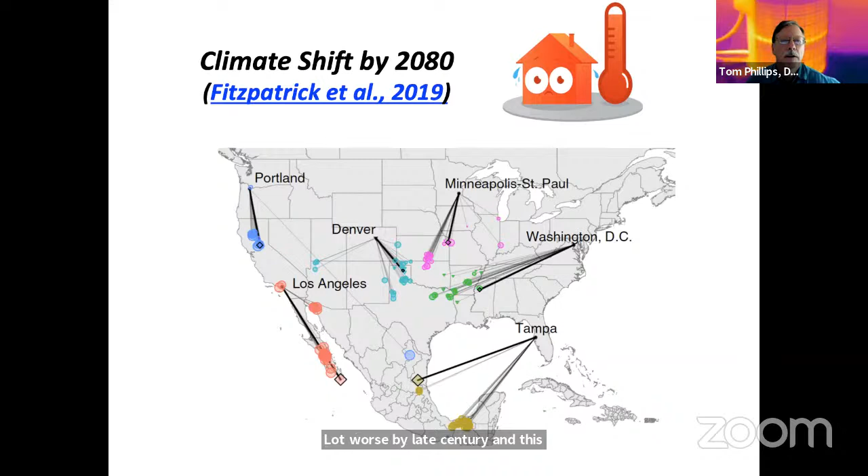This is about life cycle analysis, and it affects embedded carbon as well. This is the basic process that's been used in Europe a lot, and it's being used now in Canada and elsewhere. It's to address mainly overheating risk, but it also affects how you design your cooling system and minimize energy and carbon and so on.

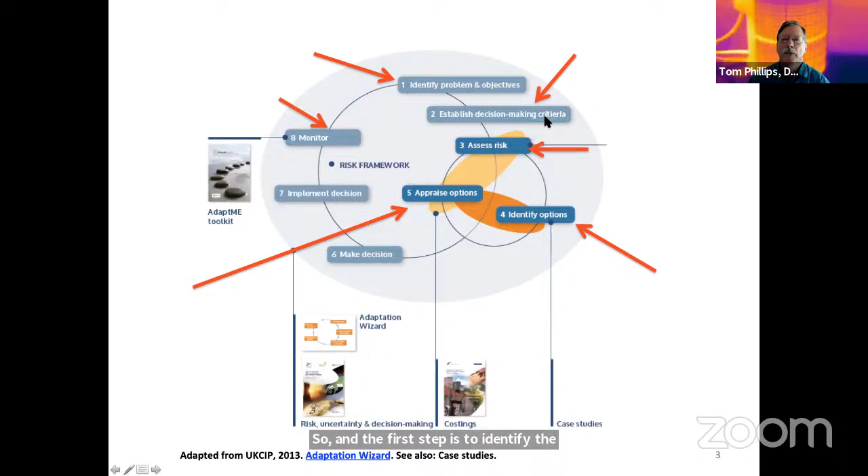This first step is to identify the risk and problems and set some target metrics, and then assess that risk using future weather files and, in some cases, extreme weather files, and then factoring in population growth.

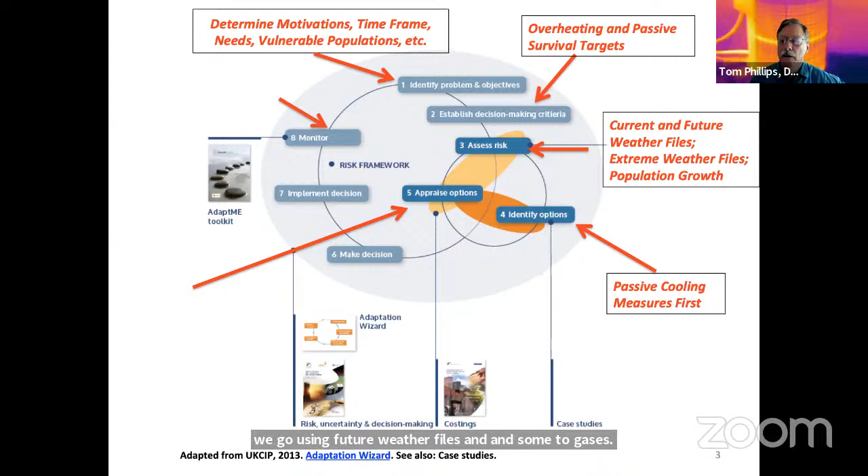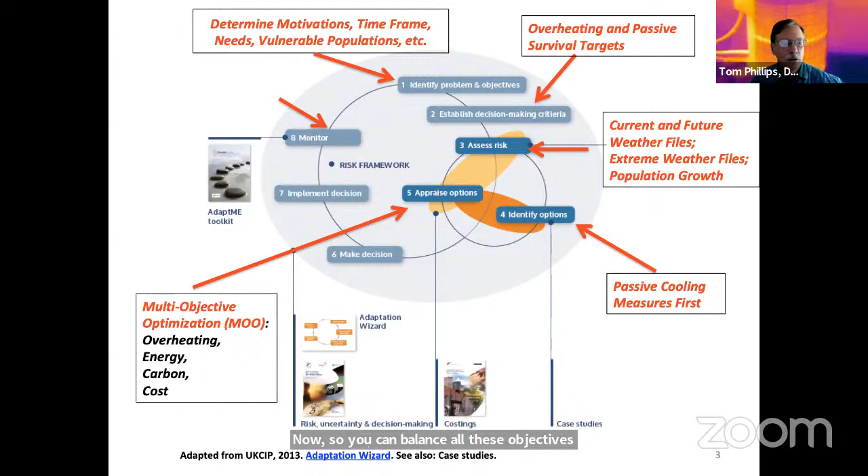Then look at your passive cooling measures first, then factor in other objectives. There's actually cool software to do that now, so you can balance all these objectives. I like the acronym MOO, so you can include carbon and cost and other things.

Then the best practice that's being used a lot, especially say by passive house builders, is to monitor the first year, to commission the building and make sure you are getting it right and learn from that.

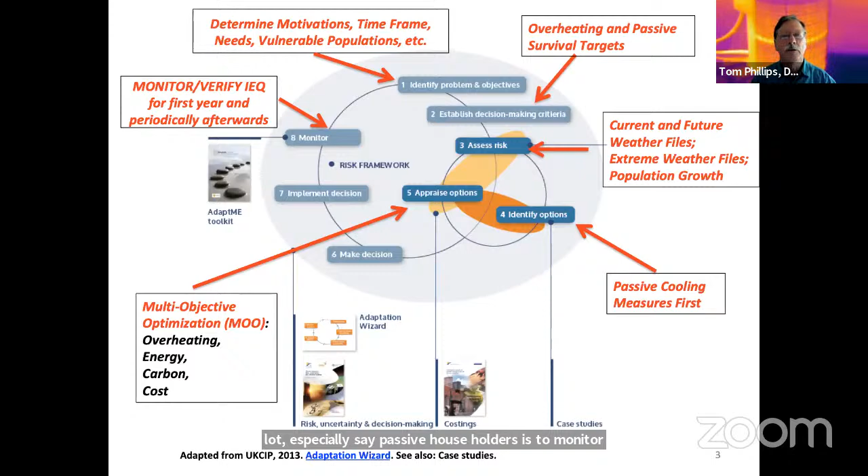The bottom line is that several countries and British Columbia have overheating standards in their building standards, and they're based on future climate weather files. Canada, as a nation, is developing that now. They've done a lot of research on this, and in most of these countries, they'll provide the future weather files, and California has developed that method and could do that.

The basic step, and answer to your questions on whether it could be done here, is that it is a relatively easy change. You can just use these future weather files and optimize your passive cooling measures. There's some research needed to estimate the net health and carbon and other benefits, and then, of course, the climate zone variation in California.

From the UK experience, they just adopted a national standard for future homes to use future weather files and minimize carbon. And they've found that they could actually reduce the cost from materials and equipment using this approach.

But it would be good to have a task force or subgroup to have the various health and building and design experts develop a kind of a California specific approach. There's a lot of reference materials from other countries.

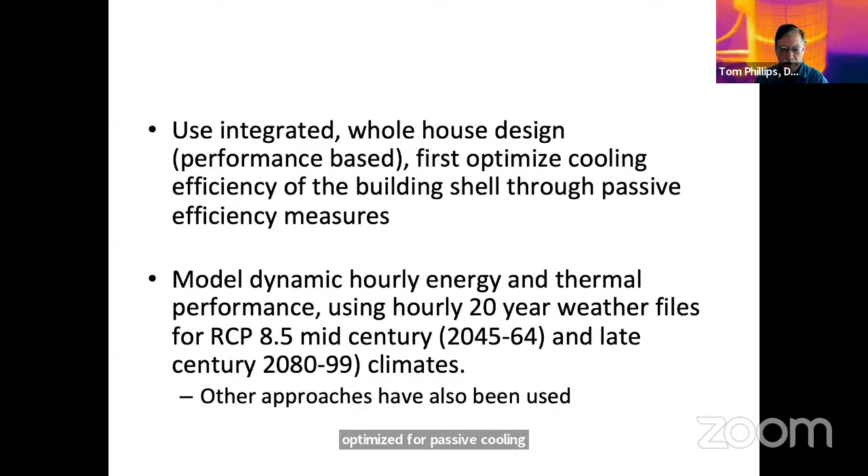Basically, the approach is to do a whole house design optimized for passive cooling, then model dynamic hourly energy and thermal performance for future climates, then assess the overheating risks as an example of typical temperature targets for the cooling season.

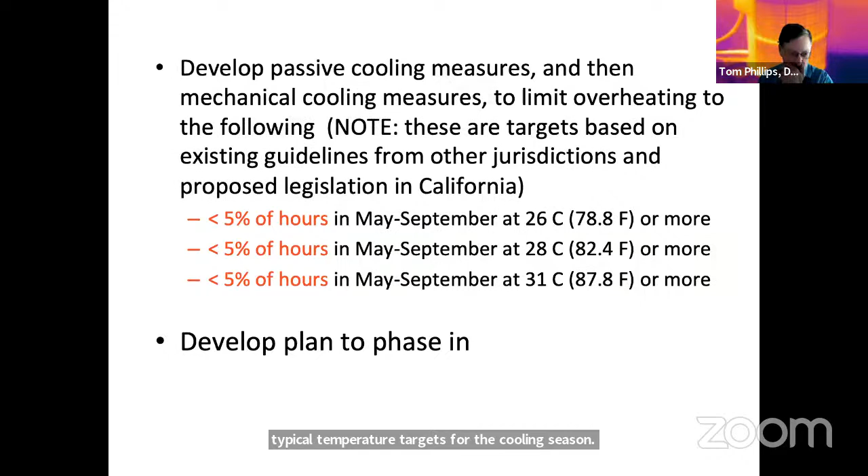Then you tweak your design to keep the overheating hours under 5%. It's done in a tier because the higher temperatures, of course, have a much higher risk, so those are the ones you really want to minimize.

And then also some developers or planners have phased in these items, so they make the building ready to add on, for example, more shading. They put in the brackets to start with and then add shading later as they go, or add in other facilities for green roofs or whatever.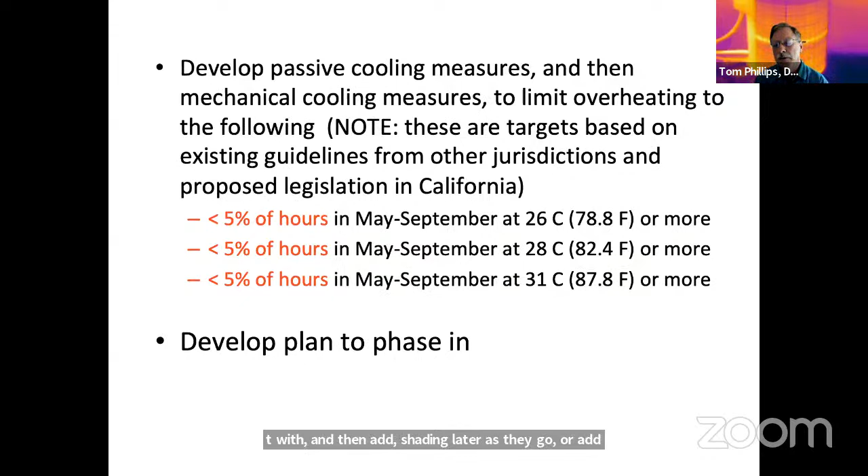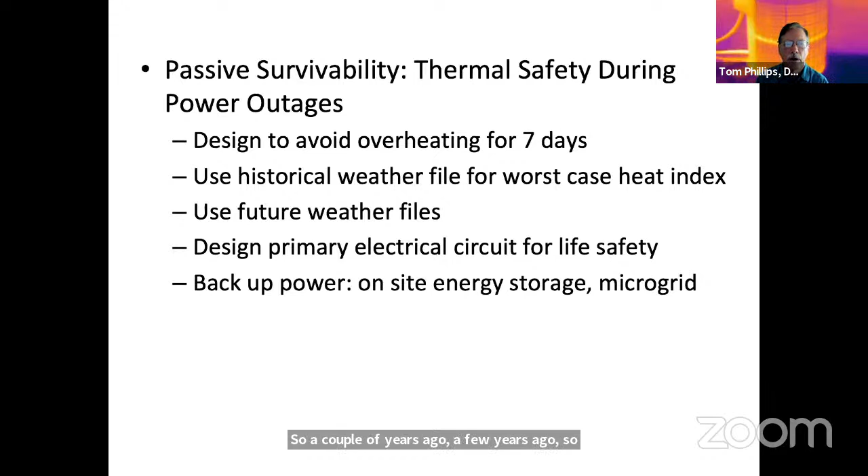And then there's also the passive survivability during power outages. We've adopted these kinds of standards in the CHPS for schools a few years ago. So there are various examples of that out there, in the US and LEED and so on.

And it has been shown to be cost effective by modeling in British Columbia and, excuse me, in other areas, I believe. New York City did a big modeling study for multifamily buildings and found some cost-effective approaches.

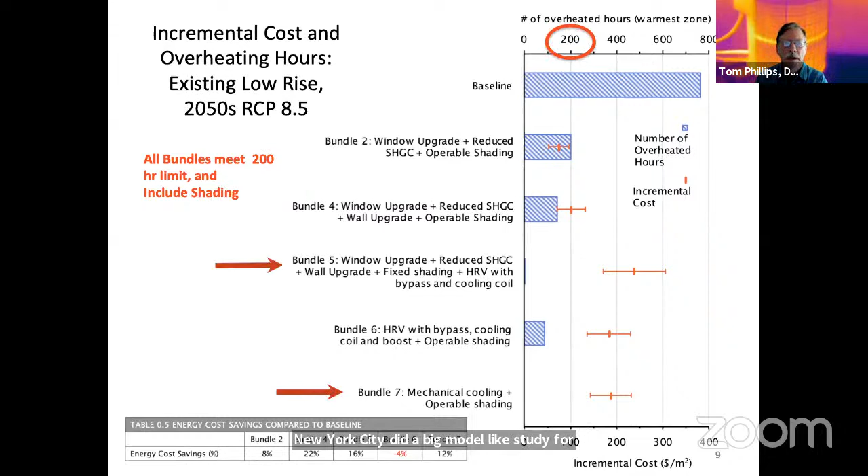So that's, I think, all I've got for now, basically. The new mantra is energy security, in terms of avoiding power spikes in power costs and reliance on foreign oil and all that.

So that's another issue, the grid resiliency benefits, which can be a big one because you can shave the peak and you don't have to start running gas peaker power plants for cooling in the evening. There's various groups in the US and elsewhere working on this, and we really need to get the ball rolling now rather than waiting 5 or 6 years for Title 24.

This was in the extreme heat adaptation plan in 2013. So I think we're overdue to address it.